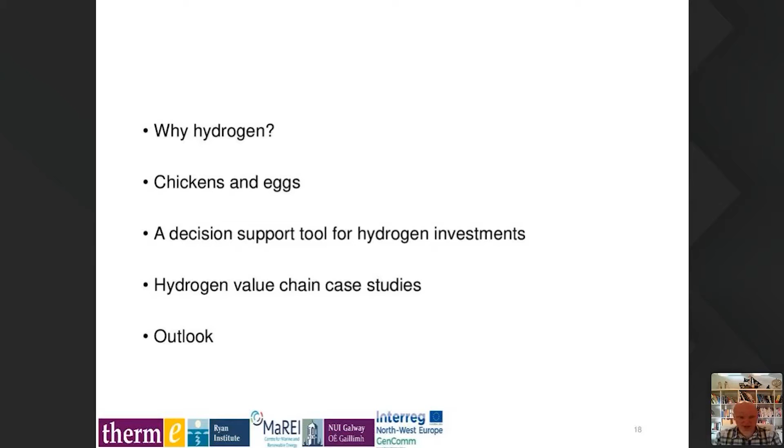Okay, so just to give an overview, I'll speak very briefly about why we're looking at hydrogen. Paul covered a lot of that, so I won't spend too much time on that. I'll talk about the chicken and egg problem with hydrogen, and then how a decision support tool, which we're working on, can help address that. And then I'll spend most of the talk on some case studies that we have run from our group here in Galway, applied to different scales of hydrogen value chain models, and what the outlook going forward is.

Okay. Well, the main reason we're talking about hydrogen, and I'm going to restrict the scope of this talk to renewable hydrogen, so that is hydrogen produced from electricity, ideally from renewable sources. The main reason is summarized in this graph from the FCHJU, the Fuel Cell and Hydrogen Joint Undertaking, an EU funding organization for hydrogen work. Hydrogen can serve as the link. I like to think of hydrogen as a glue.

It can serve as a glue between highly renewable electricity systems and decarbonized end uses of transport fuel, industrial heat, feedstocks, and basically anything across the energy use sector. You can transform that renewable electricity into a highly dense energy carrier like hydrogen. We can also have energy storage from hydrogen, so we can increase the resilience of electricity systems, and as Paul talked about, have this power to gas coupling.

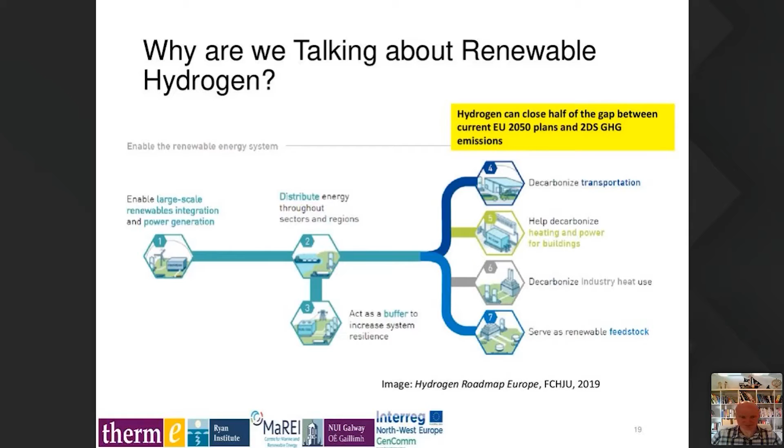The European Union has really recognized the value of hydrogen, and I realize this is a very busy slide, but I'll try and orient you through it. If you add up the trajectories of the European Union decarbonization efforts, and look at what we need to be at to avoid 2 degrees of global warming by 2050, there is a gap of 1 billion tons of carbon that needs to be closed. Studies from the Hydrogen Roadmap Europe have shown that hydrogen can assist in closing half of that gap. So 562 million tons of carbon can be avoided through the use of hydrogen.

The different colors here illustrate the different sectors that hydrogen can make an impact in. So a big impact from transport, heating for buildings, industry feedstock, and industry heat. And the interesting thing is that these sectors are almost all classified as hard to abate sectors, very difficult to decarbonize through electrification alone. So a question we get frequently is, why would we do hydrogen when we can go electric? Well, I don't view this as an either or.

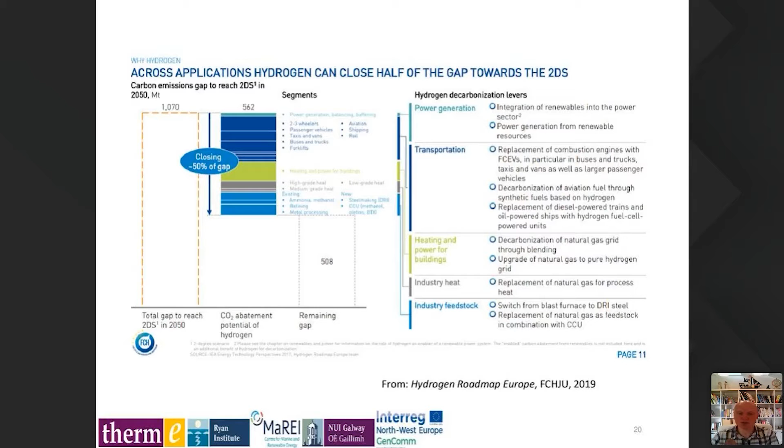I view hydrogen and electrification as being perfect complements to each other, where electricity takes the heavy lifting in domestic heat and other forms of heat and in personal mobility, but hydrogen goes after those harder to decarbonize sectors. And that's really the basis for what we're looking at within GenComm.

So chicken, eggs, and hydrogen. What do I mean by this? Well, let's imagine that we're a producer of renewable electricity and we're interested in hydrogen. We can see some benefits from the storage aspects and the grid balancing aspects of hydrogen. So you might want to invest, but who would buy hydrogen from you? Electricity generators are not typically sellers of industrial gases.

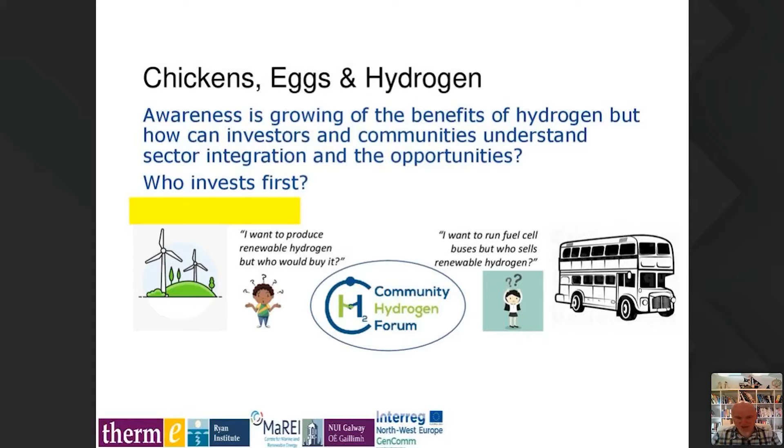Equally, if I am a bus fleet operator, the person on the right-hand side here, and I'm interested in using hydrogen fuel cell buses as a solution for air quality and decarbonization of public transport, where can I source that renewable hydrogen? How can I ensure it's renewable? Well, this is where the part of the work of GenComm that NUI Galway are involved in comes in. It's a sort of link between the two called the Community Hydrogen Forum.

So we're talking about this as the missing link, to address this chicken and egg problem. The Community Hydrogen Forum, which is going to be talked about extensively by Ian Williamson later in today's webinar, essentially serves a number of purposes. It serves to inform potential stakeholders about hydrogen. It hosts something called the Decision Support Tool, which is what I'll be talking about primarily today. And then it motivates to action. It tells you what the next steps should be in pursuing hydrogen as a solution to local energy problems.

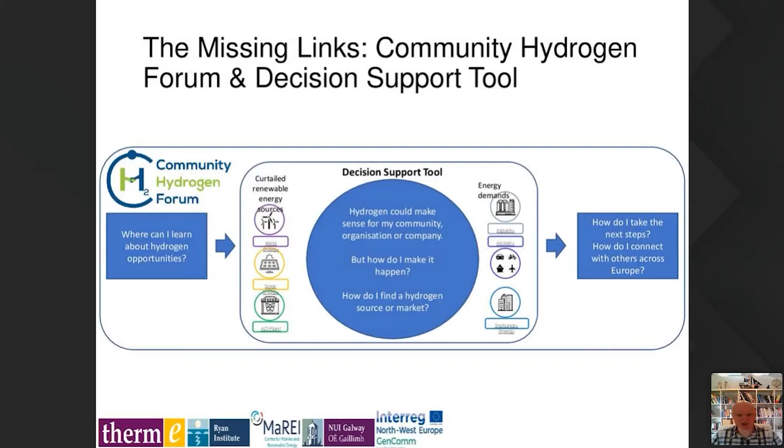So focusing specifically on the Decision Support Tool, how does it work? What does it do? Well, it's here to support stakeholders who are interested in evaluating hydrogen, particularly at a community level. And the big motivators for these are community development, decarbonization, and energy security. So we really try and come at it from a number of these different points of view. And we try and demonstrate the potential for hydrogen through examining its role in fueling public transport bus fleets.

I saw a question that came in on the chat earlier, and hopefully I'll get a chance to answer it in this talk, about how much additional electricity we would need to run public transport off hydrogen. And the answer is really not much. If you look at how much renewable electricity is available in Ireland now and how much is curtailed, we don't need a huge amount more to run our public transport systems off hydrogen. We're starting the process of expanding our work to look also at solar generated hydrogen, and we'll eventually be considering bioenergy generated hydrogen as well.

So what we do essentially is we look at large towns and cities. We look at what the annual energy demand for their bus fleets is, and we calculate a hydrogen equivalent. We then look at the supply side. We start examining wind farms. We've got statistics for many of the wind farms in Ireland and across Northwest Europe, and we're able to generate synthetic data for ones that we don't have available statistics for.

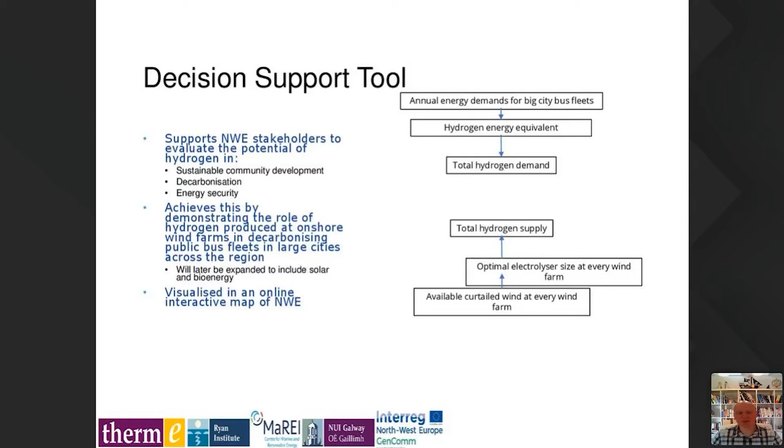We can look at what this curtailed energy available is, and we can start to optimally size electrolyzers that would be positioned at those wind farms. So we can come up with a hydrogen supply. So we've got our demand from the bus fleets, we've got our supply from this curtailed electricity. We can then link the two together with a hydrogen supply chain.

If we know the locations of these bus fleets, which are in cities, and we know the locations of these wind farms, and there are 4,252 wind farms across Northwestern Europe, we can use geographical information systems, GIS mapping, to map out supply chains that link the two.

And as a final stage in this, we can then consider top-up power needed so that the electrolyzers are running not just off curtailed wind, which would only be running occasionally, but can be running full-time with top-up power from either wind farms or the electricity grid. And this can really increase operating hours and lower costs.

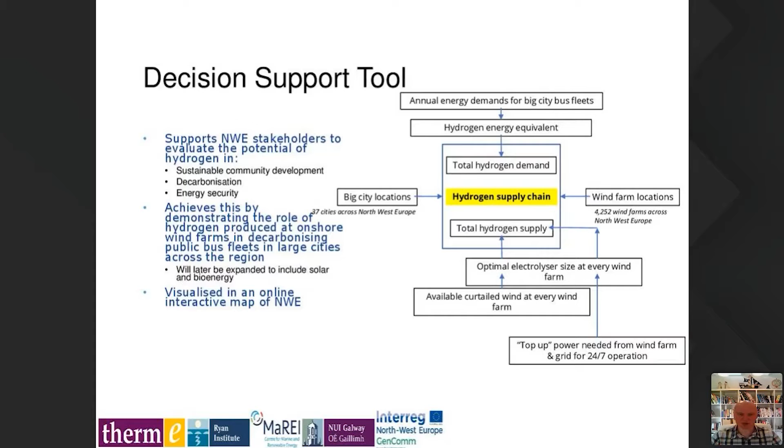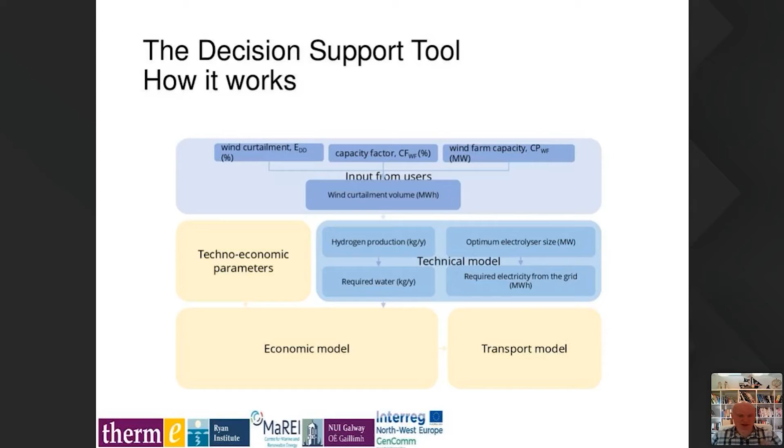We make the economic model, and we can also build in a transport model then from mapping. So this is just some of the variables that are used, that are calculated. I won't go through them in enormous detail right now. And we can end up calculating the levelized cost of hydrogen produced relative to diesel.

In all the numbers that I'm going to show you, I think it's very important to realize that the costs that I'm showing here are levelized costs. So these are the minimum costs that can be used to recover lifetime operating and capital costs for the hydrogen system. This is not what you would necessarily go out and pay for hydrogen now. This does not include taxes. It doesn't include some aspects of land costs and some aspects of construction costs. But what we've tried to do is make a baseline of comparison across Ireland and across Northwest European countries.

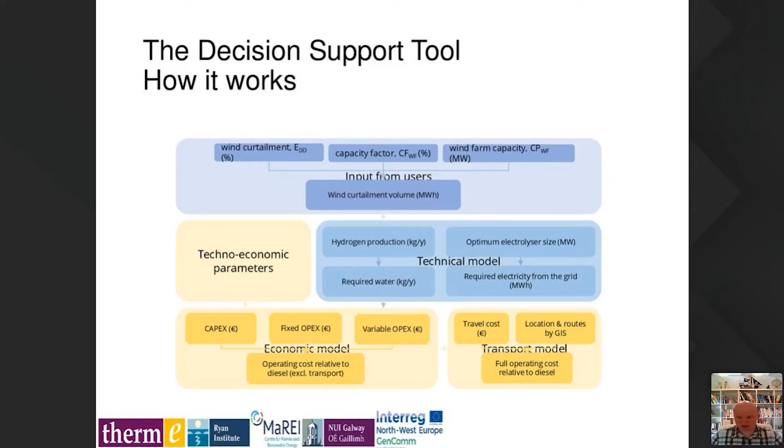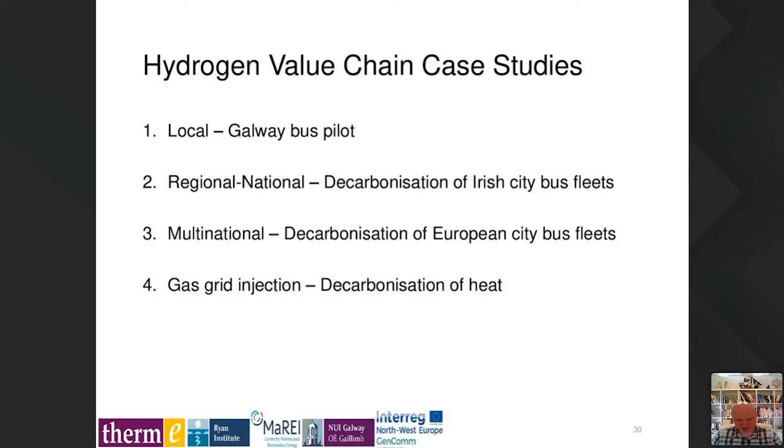Okay, so some value chain case studies. I'm going to look at different scales. I'm going to look at the local scale for here in my hometown of Galway, the national scale for Ireland if we were to develop a coordinated national supply chain of hydrogen to run bus fleets. We can then look at a multinational decarbonisation of Northwest Europe's city bus fleets. And then we'll also look at gas grid injection, which is not looking at the bus fleet side of things, but is looking at the use of hydrogen to offset fossil fuel gas. And we published a paper on this, and I'll be sharing the information on this.

So for Galway, we did a reasonably small scale case study. About 30 kilometres west of Galway is Ireland's largest wind farm, the 174 megawatt Galway Wind Park. It's starting to face into some challenges around curtailment. And so we've worked with the local stakeholders here in Galway and at the wind park to develop a small case study that said how much would it cost if we were to install an electrolyser at the wind farm site to avoid the curtailment and constraint and to produce fuel for the Galway bus network for only 5 buses.

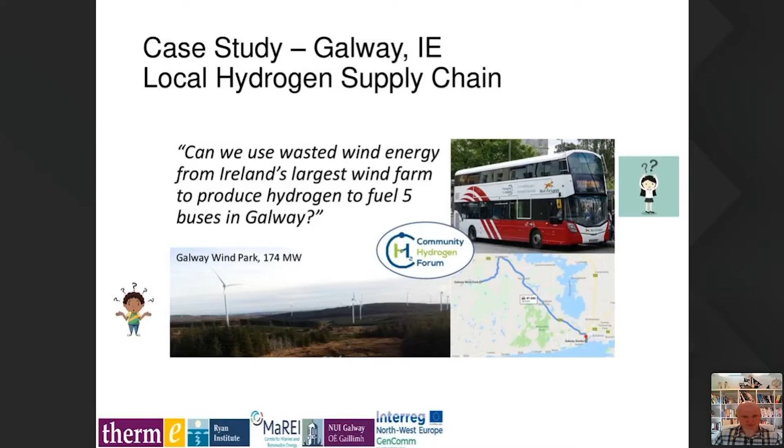And this is just some of our output data. Again, I've described the model, so I'm not going into it in much detail. This is levelized cost of hydrogen. So this again does not include taxes, it does not include profits, it does not include some aspects of land costs and construction costs. It doesn't include grid connection costs either. So this is the minimum possible hydrogen cost that would cover the operator's expenses.

And we find different regimes of operating the electrolyzer: curtailed only obviously leads to higher hydrogen costs. Using wind energy when it's available to run the electrolyzer significantly reduces costs. And running the electrolyzer full time by topping it up with additional power from the grid decreased costs a little bit more. And if we look at average annual electricity prices between 0 and 8 cents per kilowatt hour, we can see a spread of costs.

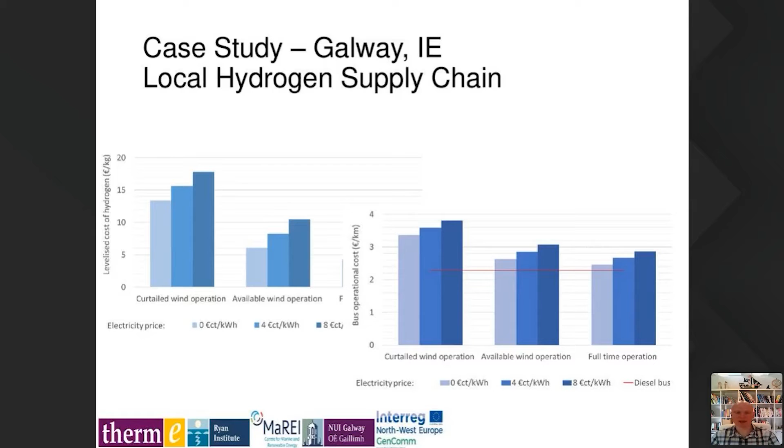But how does this compare to bus fueling costs? Well, if we then translate this into a bus operational cost per kilometer, we can see how it compares to the red line of diesel here. And you can see that again, for a fully optimized system, we're starting to get into a comparable range of costs. And we can see that any changes in carbon tax are going to have a big impact on the comparability of these two energy systems.

Looking then at the national scale, what if we scale this study up? And this is the nice thing about a decision support tool, we can do what-if studies. What if we scale this up beyond 5 buses in Galway and said we are going to maximize the use of curtailed and wind-generated electricity to run the major bus networks in Ireland. So we've looked at Belfast, Cork, Dublin, Galway, and Limerick.

We've been able to say that for each of these lines, so Dublin here is the red line, which is not the lowest cost, by the way. Cork comes in at the lowest costs because of its access to many wind farms in West Cork and Kerry. But Dublin has got the longest line here, and it means that we can start to decarbonise the bus fleet in Dublin at a cost currently of about €7 per kg.

And if we go further afield and start pulling hydrogen from other wind farms further and further away from Galway, or further and further away from Dublin, which have a better resource, we will increase costs slightly. But we can decarbonize 100% of the city bus fleets using hydrogen supply chains like this, that only use curtailed wind and a small portion of the wind that is generated at the existing wind farms in Ireland.

If we project forward to 2030 costs, we see a significant drop. This is where the hydrogen industry believes the costs for equipment and operating costs are going by 2030. So we can see a significant drop in costs for all the towns. And again, how does this compare to bus operational costs for diesel?

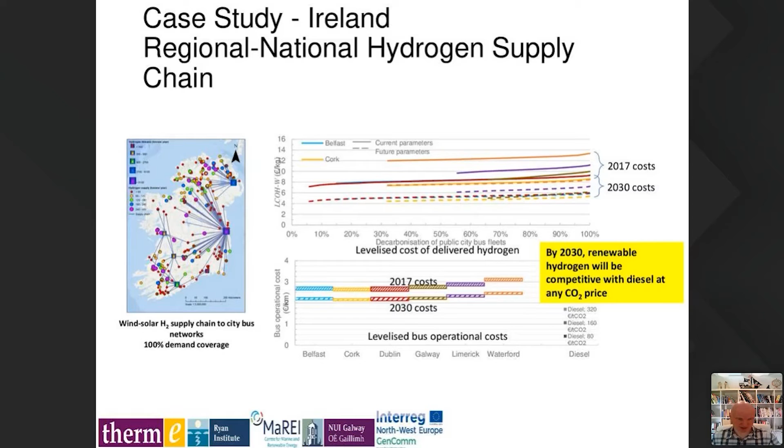Unfortunately, sorry, my yellow box there has covered over my blocks for diesel. There's some behind the CO2 price wording. There is a block there for diesel, but what these numbers are showing is that by 2030 we have cost parity with diesel, regardless of what the carbon price is. So there's significant scope for reduction in costs for hydrogen.

I'm conscious of time, so I'm just going to go slightly fast. This is what I really want you to take away from this call: the online decision support tool. If you go to our online portal for the decision support tool, which is communityh2.eu, you can go to the decision support tool tab, or DST. This is our publicly available version of the decision support tool.

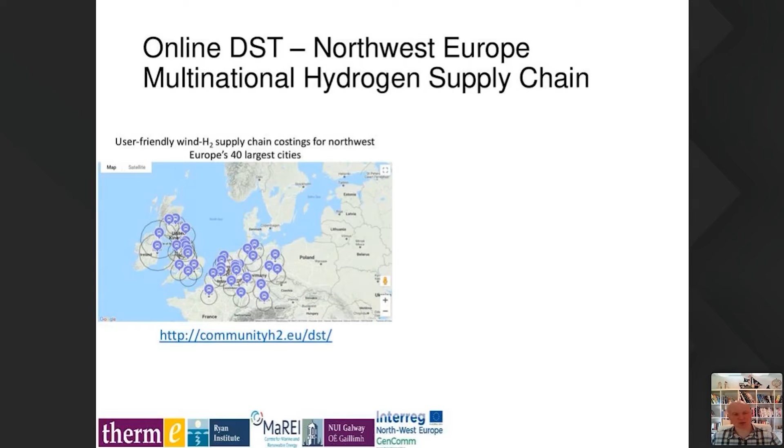It is built for Northwest Europe, and it essentially tries to simplify the output that I've just shown you on an entirely Northwest Europe scale. So the kinds of things that you'll see, again, we'll look at this solely for Dublin, and the kinds of outputs that you'll see if you were to click on Dublin on the website

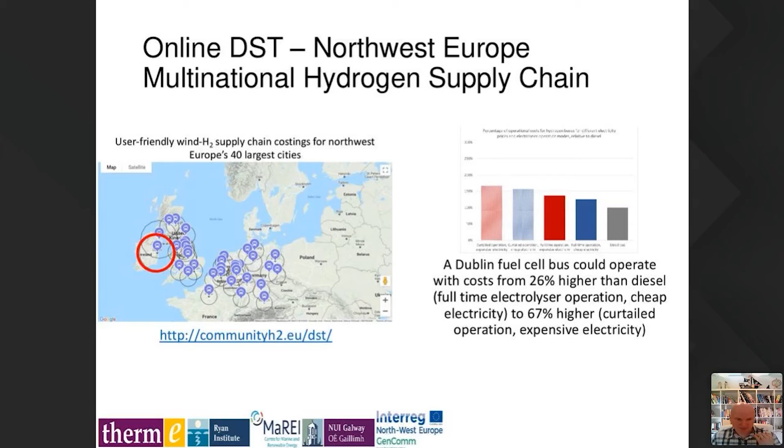This is our cost comparison, and again, we're trying to compare costs all across Europe, so there are difficulties in how we interpret that data. So we've taken a baseline of diesel operating costs to be 100%, and we've looked then at different electrolyzer operating regimes and different electricity costs to come up with a spread of hydrogen-based costs using currently available technology.

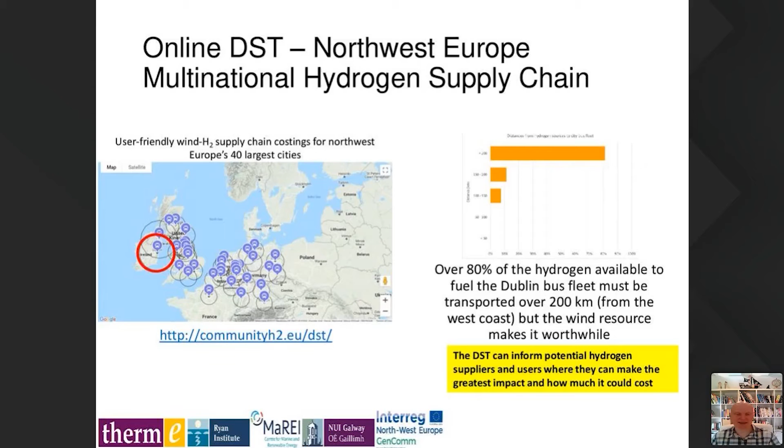As a very final point, we've done some work on a gas grid injection supply chain for Ireland, again using curtailed wind, available exportable wind, or curtailed wind plus grid electricity to increase run hours. We've done the same studies, except we have looked at gas grid injection.

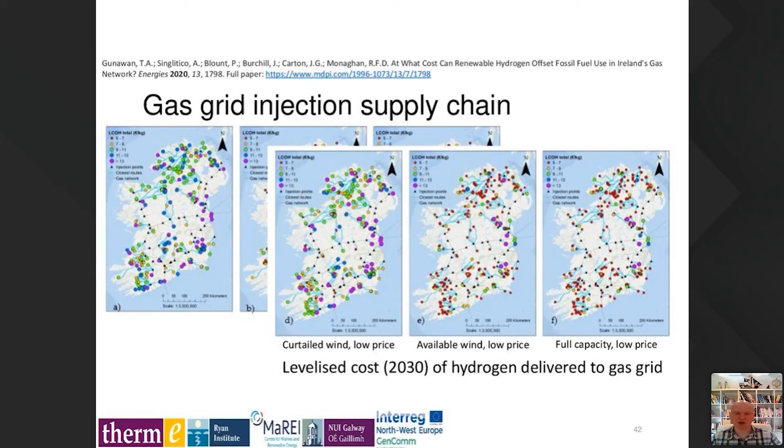So we can see again that here's our levelized cost if we look at high electricity costs, and here's our levelized cost if we look at low electricity costs. So the costs are coming down to the range of 5 to 7 euros per kg. But again, this is levelized cost. This is not the cost that you will go out and pay today for renewably generated hydrogen, because the supply chains simply aren't there yet. This is all assuming highly optimized supply chains.

So I'll leave it on this slide and encourage you to go to the communityh2.eu website and play with the tool yourself. And please give us feedback. We're constantly looking for ways to make it more user-friendly and more applicable. And with that, I'll hand it back to Paul.